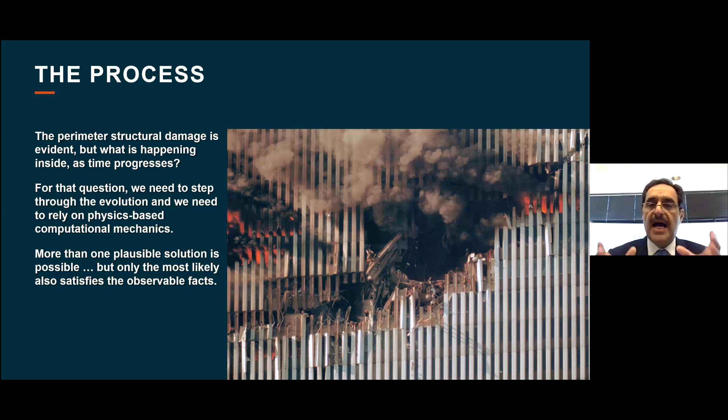Now, more than one hypothesis is possible and was investigated. But once you constrain it by what physics allows and the exterior observable events, like the photo you see on your screen, we arrive at a single most likely plausible course of events. That's what I'll present to you.

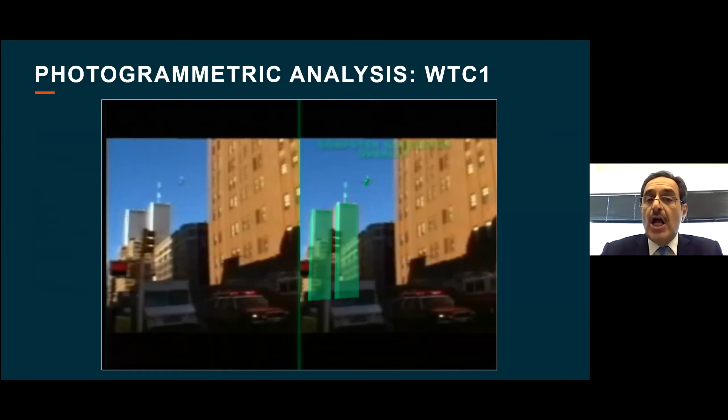So how do we go about doing such an investigation? First, for the collapse of the North Tower, there was a single video that captured the impact, which you just saw a snippet of. Now, if you think about trying to triangulate where the airplane came from and at what speed, a single video is clearly not enough—you typically need two. But we made use of the fact that the video had audio recording, and we could hear the frequency shift as the airplane went behind the building you see to your right.

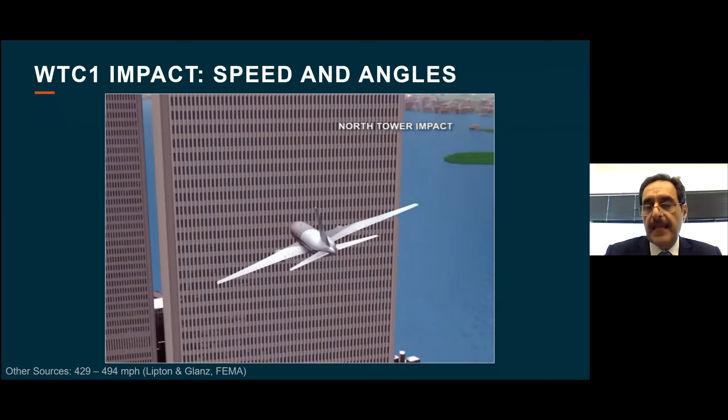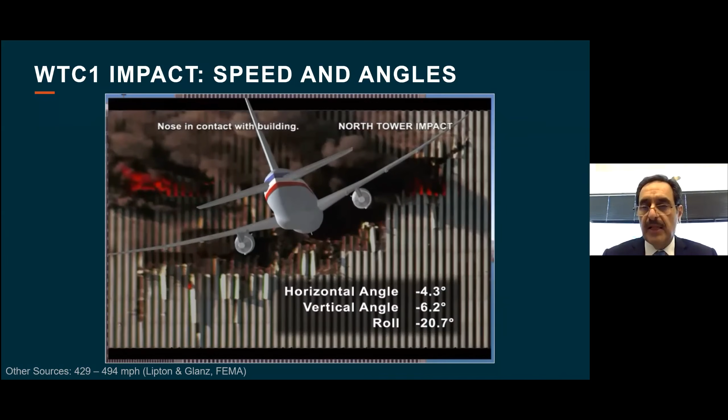That happens to be an AT&T building. Using those two pieces of information, we're able to arrive at pretty good estimates of the impact speed: 500 miles an hour, which is cruising altitude speed. The North Tower impact is pretty much head-on. It engaged four floors, between 94 and 98, but otherwise went centrally through the center of the building without much of a rolling angle.

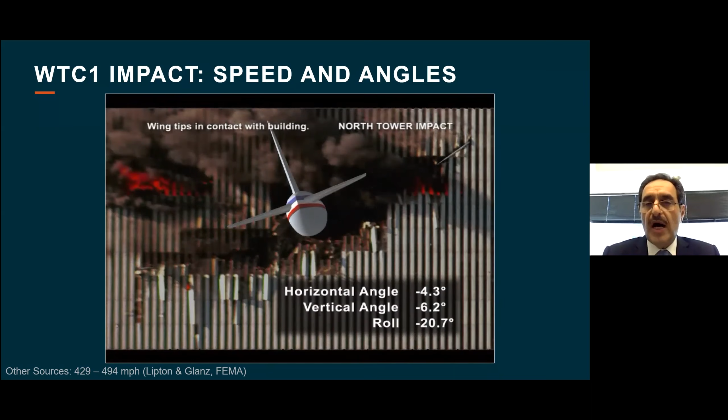So this is the first piece of information for us to start understanding what happens once that airplane goes into the tower. As I said, we're able to ascertain what happened to the exterior of the tower down to graphic detail. This image—and I won't zoom into it further because it still shows survivors who were on those floors at that time—has a level of detail that allows for a very accurate assessment down to what's happening at every connection of every beam, every column.

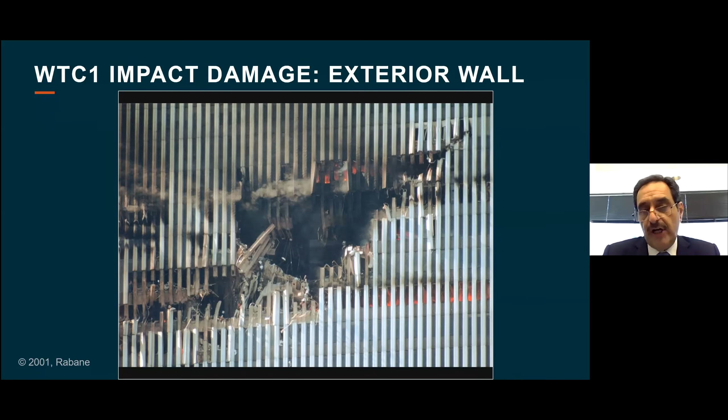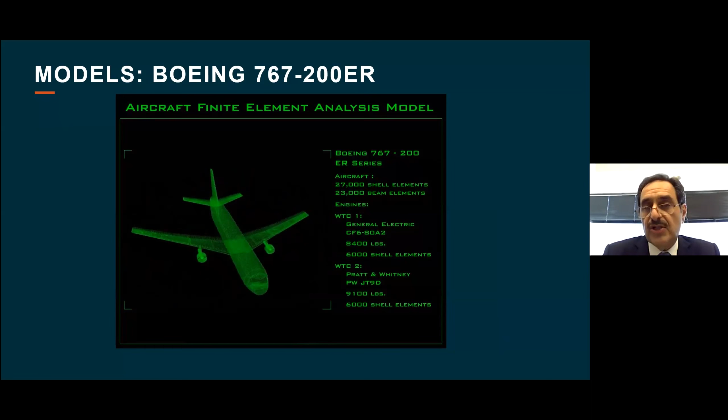But in order for us to understand what's happening inside, we need to build these extremely detailed models of airplanes. Of course, the only place those come from is the Department of Defense, because such airplanes have a defense version of it. We had consulted for the Department of Defense on airplane crashes before, so we had access to such detailed models.

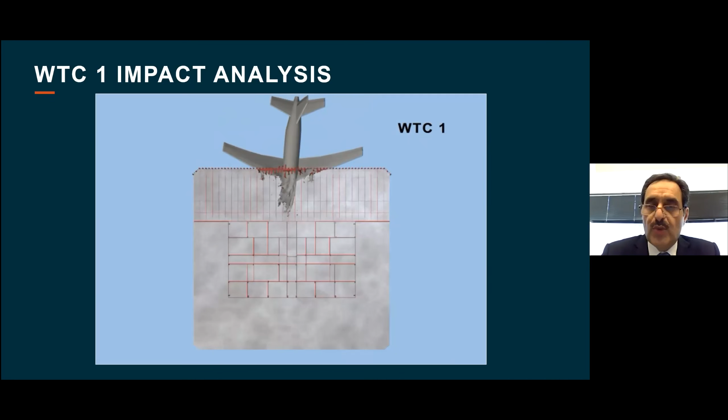As you can see on the screen, we're talking about a pretty sophisticated model. Once we take the model of the airplane and impact it at the speed we determined before, we see what happens to the inside of the tower. We're looking top down at a given floor, and it's interesting to understand what that is telling us. It tells us that the airplane does not penetrate whole.

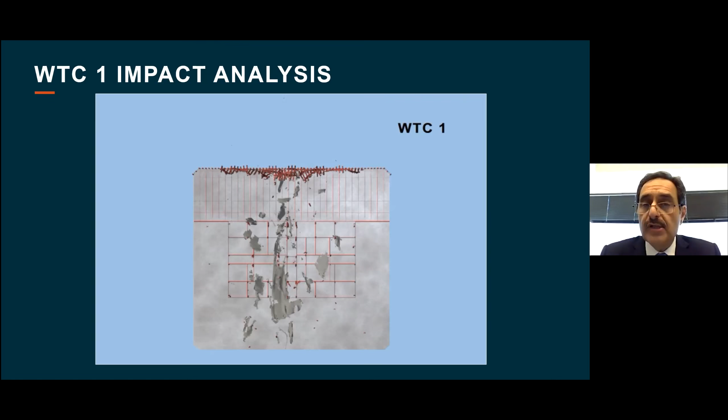It has a thin aluminum skin, so the minute it breaches the perimeter wall of the building, it's converted into an incredible flow of debris, very damaging debris. These are pieces of metal flying at 500 miles an hour, but it's more akin to a power wash than to imagine a plane going in whole into the building. Of course, some of the columns in the center of the building, in the core, you see them getting severed.

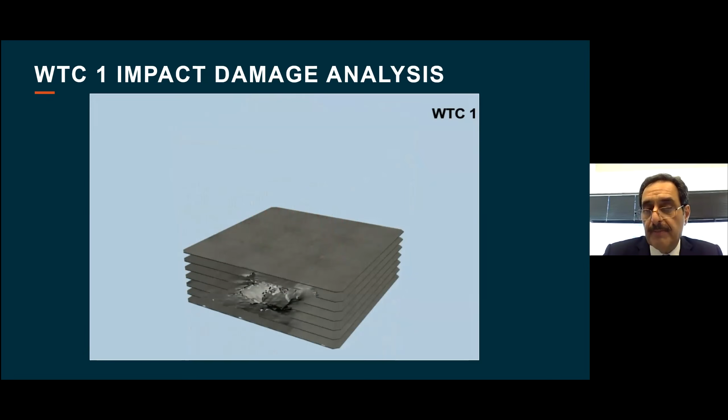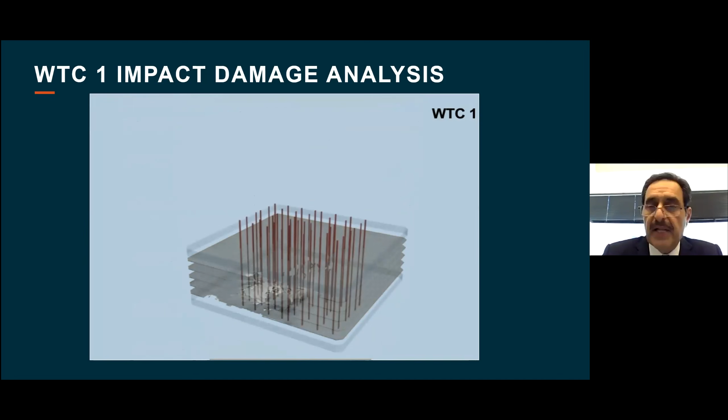So if I am to summarize quickly what happens to the building: the exterior perimeter, about half of that face is severed over about 4 floors. The concrete slabs are only damaged in the immediate vicinity of the impact. It's not a failure beyond that, which some people had postulated. You will see in the center core of the building, in the red zone, columns are severed.

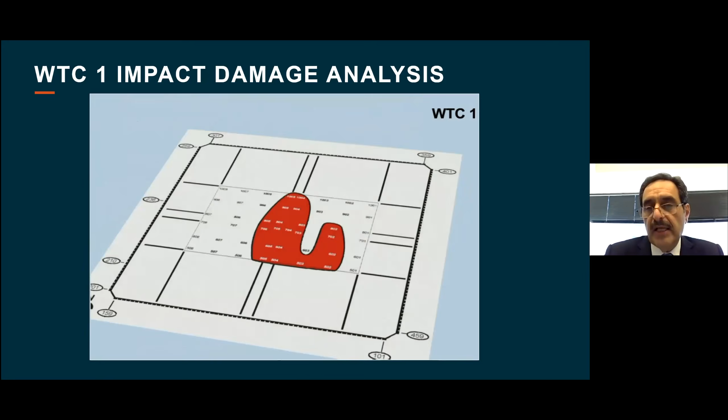Notionally, you can intuitively understand that the columns were severed in the first few milliseconds and the tower stood. So the towers could sustain the loss of the columns in the red region. But after that, for the rest of the duration, fire is attacking the rest.

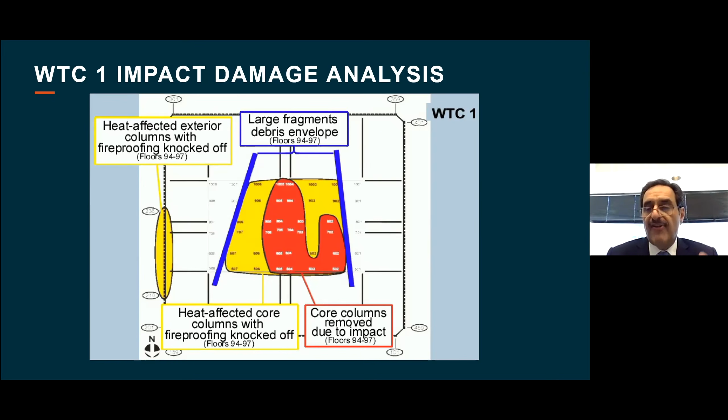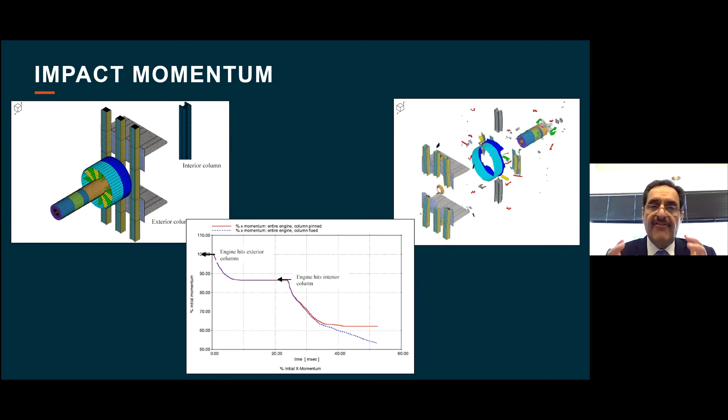Just to give you a sense of the violence of that impact, this is a model of just the engine of the airplane penetrating the exterior perimeter wall of the towers. If you calculate how much energy is left in that engine after it's penetrated the exterior wall, it's only exhausted 15% of its momentum. So it still has 85% of its damaging potential. That is just to display the violence of that attack.

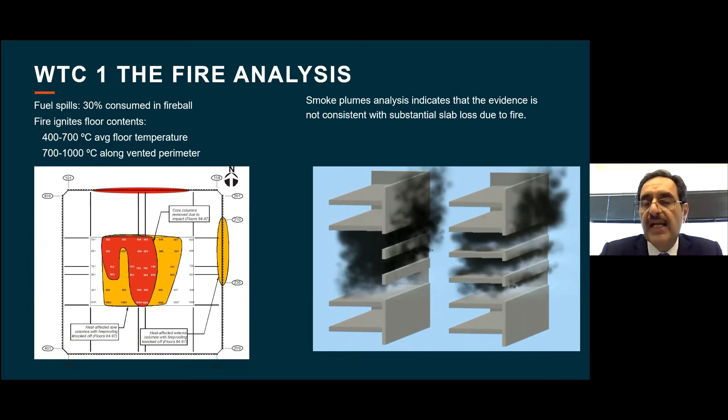People talked in the immediate aftermath of 9/11 that the construction of the Twin Towers was so light that there was a wholesale failure of the slabs. That did not occur. We have the investigations you see on the right screen. By looking at the pattern of smoke being exhausted from the fires, we can tell, in addition to having photography, that the slabs are in place.

So for all of the innovation introduced in the towers in the 70s, they are a marvel of engineering. All the innovation, all of the firsts that people questioned after 9/11 as being potentially the fatal flaw—ultimately the investigation revealed they were not a fatal flaw.

Now, the fire that started by having the fuel disperse across entire floors and light up simultaneously—the temperatures reached are no different than a regular office fire. What is different about them is the simultaneous nature of them across multiple floors, up to 4 floors.

People talk about an explosion that arose from the south side of the North Tower. That is more like an aerosol can mist that you ignite—it's a deflagration, not an explosion. That consumed about 1/3 of the fuel.

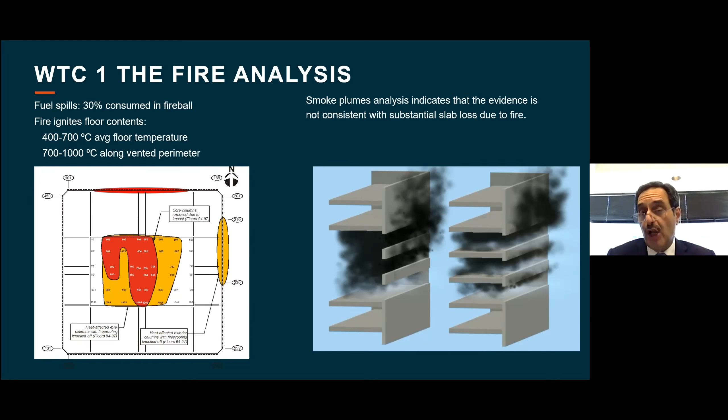1/3 dispersed on the impact floor and started the fires. The last third went down the core of the building, and that is why you hear stories of fires erupting in the lobby at the base of the towers.

Also, what is special about those towers is that they had that outrigger hat truss at the very top of the building. What was its function? Its function was to stiffen the towers a little, because under heavy winds they would sway, and they would sway up to 10 feet. So this hat truss was meant to stiffen the top so that they sway less.

I know you think it's dramatic for a tower to sway by 10 feet, but the human body responds more to acceleration rather than to the extent of sway.

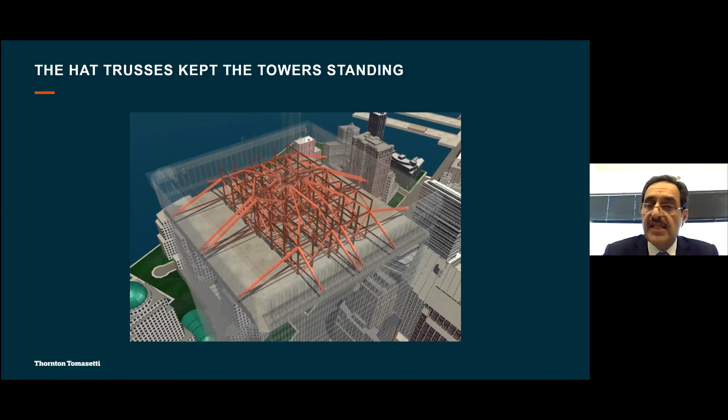And it doesn't mean it's unsafe, it's perfectly safe. But those trusses also carried the two major Manhattan TV broadcast antennas. On 9/11, they had a life-saving role. As you can see, that hat truss connects all of the interior columns to the exterior perimeter columns. So what happened?

Before impact, if we think of green as good, red is bad, yellow is in between - those towers are designed to sustain hurricane winds, we're talking over 100 miles an hour. Well, on 9/11, the winds were below 10 miles an hour. So you have excess structural capacity that is being untapped.

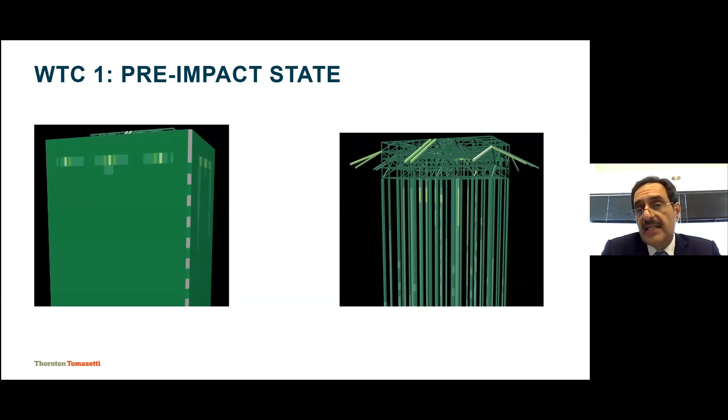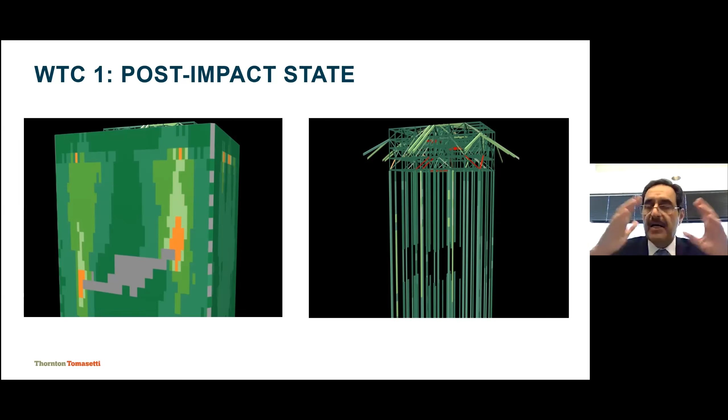The airplanes hit. Immediately after, if you look on the left picture, you see the stresses are redistributed around the injury on the outside wall. As massive as it is, you get some stress concentrations at the edges, but the towers redistribute the loads very well. In the core, on the right pictures, you see some columns missing.

Well, now you have up to 20 floors dangling along those columns that were severed. Their weight, instead of being sent down to the foundations, is hanging off of the truss. The truss then distributes that load to columns that are still unsevered, and their weight goes down to foundation. That is why the tower stabilized immediately after the impact, and that is what essentially enabled the safe evacuation of the entire population that was below the impact zones in both towers.

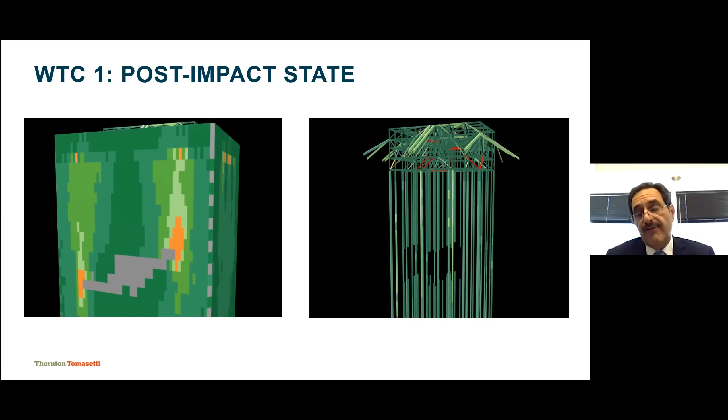Our death toll was primarily people that were above the impact zone and couldn't evacuate, and the first responders that rushed in to try to help the survivors and help with the evacuation.

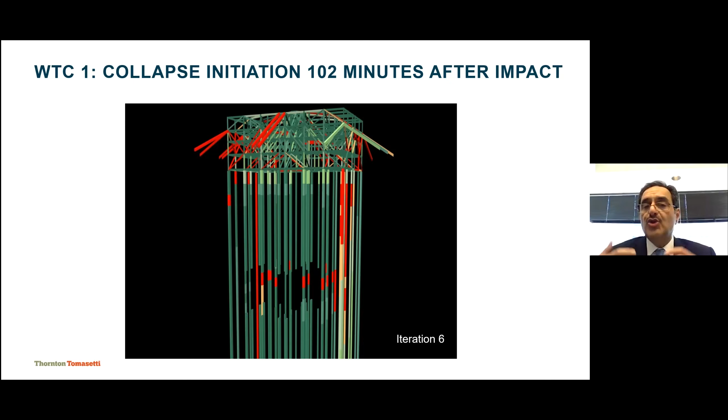Of course, 102 minutes later, the fires continuously weakened the steel. Steel at those temperatures doesn't melt, it just weakens. So think about it - at 1,000 degrees Fahrenheit, the steel is half as strong as it is at ambient temperature. When the temperatures reach up to 2,000 degrees Fahrenheit, the steel has lost 80% of its strength. So clearly the core is being weakened, and the hat truss is working harder and harder to try to shed the load onto surviving columns, but ultimately there's simply not enough capacity in the tower, and the collapse initiates.

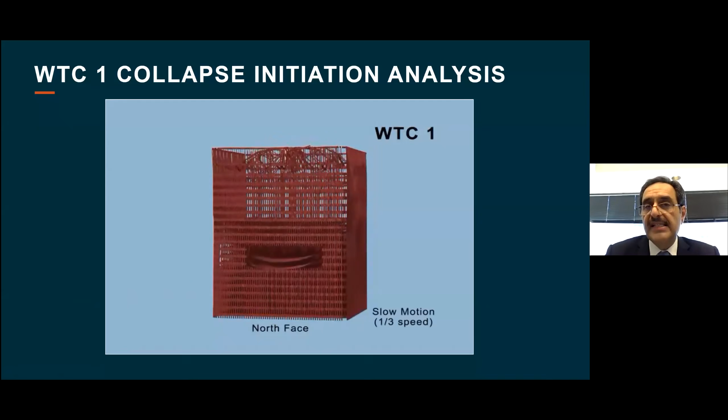That is the collapse of the North Tower. You can see it core driven in the center first, and then the outside perimeter wall follows.

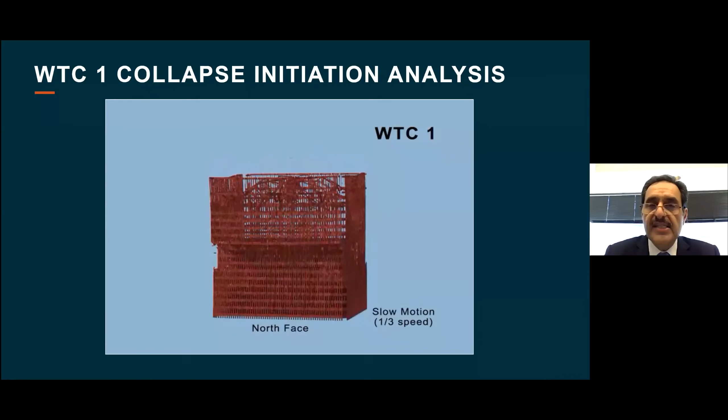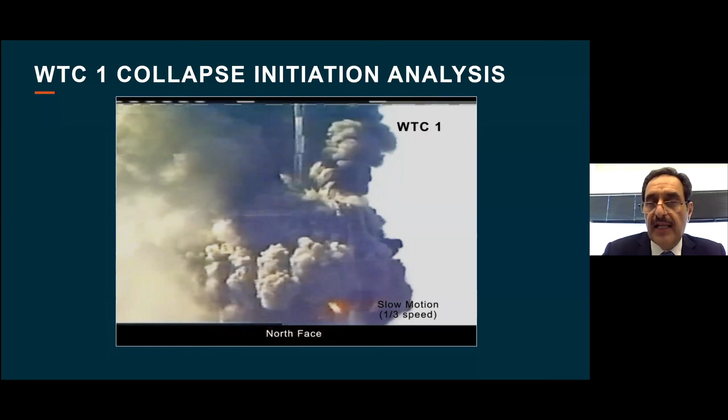So how do I know that this physics calculation is meaningful? We overlay it on actual video footage on the day, and keep your eye on the TV antenna at the top, and you'll see it starts coming down exactly the way the analysis predicted the collapse happened. The overlay of the calculation and the observable events is amazingly good.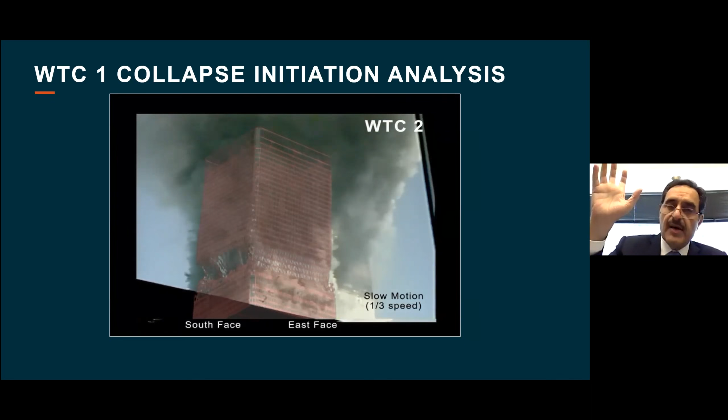The South Tower - I won't go through the whole investigation - but the South Tower impact was eccentric. And that's why the South Tower first tipped at the top, but then gravity is the single strongest force that governs a collapse. Once that tip occurs, the rest is simply coming down.

It's a pancaking event, floor over floor over floor, until you just have a massive rubble at the bottom. So when people talk about this looking like an implosion - yes, a building collapses, a building of that height always collapses that way. It never tips over sideways. That's cartoons, that's not physics. That's the mere force of gravity.

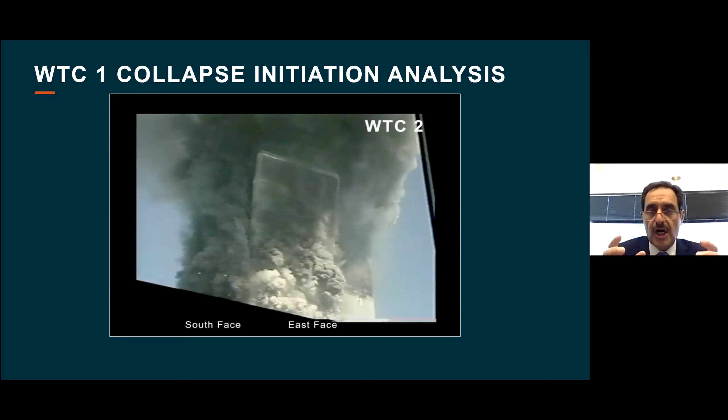People who induce implosions, all they look to do is weaken columns such that gravity does most of the work. In this case, the airplane attack did something similar, and the subsequent fires weakened columns, and ultimately gravity takes over.

So I know I rushed through an investigation that lasted 10 years across the 3 towers, but it allowed us to speak with knowledge to some of the public questions beyond just the litigation. The Twin Towers were well designed, extremely well maintained, beyond what is customary in high-rise buildings. We understand exactly why and how the collapse happened. It is not just the airplane impact, it is the fire attacking and diminishing the residual remaining strength in those towers.

And they had lost their ability to resist the fire because they got stripped of their fireproofing by that power wash from the debris of the airplane. We understand where the collapse initiated, how it initiated, and why it fell, and the differences in the collapse mechanism between the South Tower and the North Tower. So in some sense, for us to be able to understand how we look at other buildings or future buildings, it was critically important for us to understand what happened here.

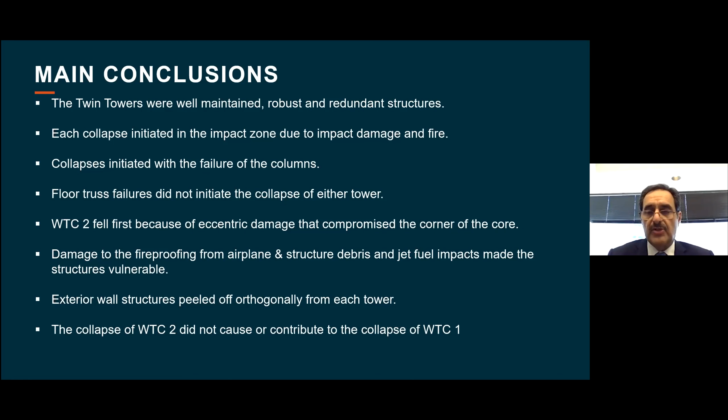So now that we are 20 years later, some of the normal questions one would ask: did we change how we design and build towers, especially skyscrapers? The answer is yes. We learned a lot from 9/11, the way engineers have historically always learned from failures. Even when things were done well, there's always a lesson to be extracted. Tangibly, the lessons adopted in future buildings is that man-made attacks are part of the profile of what we consider in the design of high-rise buildings. Evacuation and means of egress are part of explicitly what we are designing, thinking of events of this nature.

Does it mean that we design for plane attacks? The simple answer is no. Could we? Potentially we could, but no one wants to live in a bunker in the sky or work in a bunker in the sky, right? It is the same reason, and that's part of our daily experience. When each one of us gets into a car and drives, we know that we are not perfectly safe. We are taking a measured risk just because we grow up seeing car accidents, seeing mangled cars, probably knowing somebody who was injured or died in a car accident. Yet most of us don't bring that thinking to buildings because no one talked to us about it, unfortunately. And there is a communication gap between how engineers work and what the public at large is aware of. So no, we do not design for plane attacks because it's not part of what is desirable, or at least that is the current risk profile of what we believe the urban environment chooses to be.

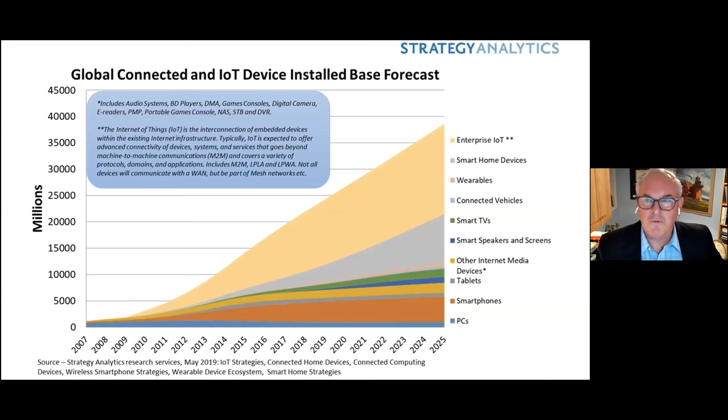We're layering on top of this more connectivity with the Internet of Things. From a base around 2007, when we virtually never connected physical objects to the net, estimates are that 4 years from now we'll be at about 38 billion connected devices. Everything from our refrigerator to our smartphones, talking to our cars - everything's connected. But those connections again create dependencies and interdependencies, and create the risk of cascading failure if we don't think about how we deal with issues of safety, security, and ultimately resilience. So this captures the story of the Internet of Things.

At its core, another way to capture this is that part of our challenge with interdependency is systems that were often built for a specific purpose - to provide power, to provide transportation, to provide fuel or communications. Over time, we've engineered these so that they are constantly interacting with one another, so there's a level of tremendous mutual dependence and interdependence.

If we lose power, there's one impact that's most obvious for us: it cascades and impacts transportation and emergency services. If there's no power, you can't run a compressor station that moves natural gas down its line to ultimately provide that fuel. Our communications ability starts to fail. Our water systems rely on energy, and if we have no water, we probably don't have any way to cool a power plant, which may lead to it coming down.

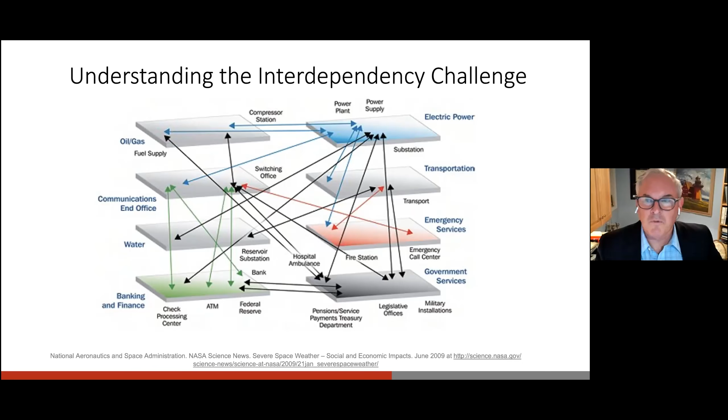As we saw with the story just this past winter, with the failure of the Texas power grid, its biggest impact was loss of water, and the impact that even had on providing medical help and health services at a time when we were trying to treat people with COVID.

In Puerto Rico, we saw this really play out in Hurricane Maria, this risk of cascading effects. Hurricanes hitting Puerto Rico is not new; they've been hitting Puerto Rico for its entire existence. What made Maria truly catastrophic is that all the lifeline systems, all its critical infrastructure, failed simultaneously.

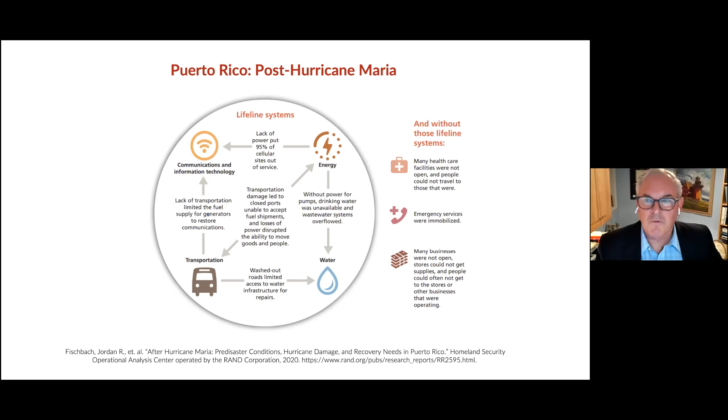When the power went out, the communications went out, and we lost the means to move water, and there was no longer water to be pumped to provide people basic services. Transportation systems were knocked out, so you couldn't move the diesel fuel needed for backup generators. And so systems continued to fail, including the port and the surface transportation that could move things out of that port. So why Puerto Rico ended up basically completely on its knees was because the total systems failed as a result of the way the hurricane impacted on it.

On 9/11, there was another part of the story that people don't know, and this is such an important one. It took us many years to understand that in fact the towers were built quite robustly and capable of withstanding the impact they had, up to a point. We tended to feel in that day that we were in fact incredibly vulnerable, incredibly fragile.

10 years after 9/11, I was able to finally get this story told. If you just go on Google and search 'boat lift,' you'll see this story. When the towers came down and people fled, they went in all directions, and many went south, discovering, some of them for the first time, that Manhattan is indeed an island, and they couldn't get off. So they were trapped down at Lower Manhattan, and a Coast Guard lieutenant on a New York pilot boat, who was there to try to support a medical evacuation of survivors, which unfortunately there were not, realized that we needed to coordinate a way to get people off the island.

He issued a call over Channel 16: all available boats, if you can help evacuate people from Lower Manhattan, come to Governor's Island, just off the tip of Manhattan. What was extraordinary was that over the next 9 hours, 500,000 New Yorkers were evacuated by boat, which is bigger than the evacuation at Dunkirk, where 338,000 British and French soldiers were evacuated over the course of 9 days. And this happened literally in real time.

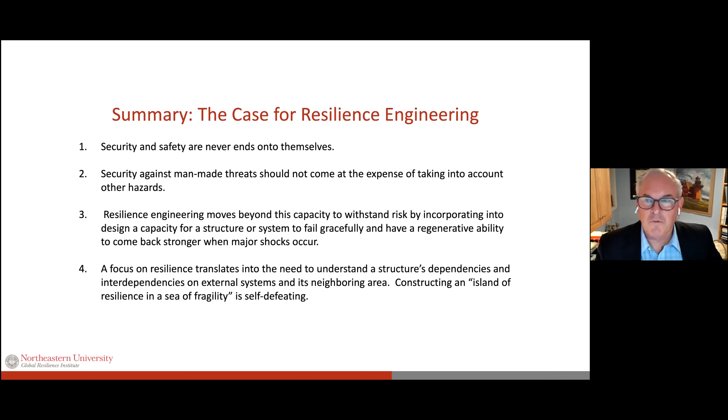At the end of the day, we can deal with risk, but we have to think about it in the context of safeguarding critical function. We've put enough on the plate here that questions will come, and we'll go from there.

Thank you, Steve. Carol, do you have any questions? I don't necessarily see them. I will have my own questions. I will mention...

One question came in from the audience, and I encourage others to pose them in the chat. The one I saw, about floor trusses, has since disappeared. But let me preface that question with a return to the analysis of the collapse of the towers. Najib, I think you left us all breathless with those animations and your narration and explanation. There are topics that people continually insist are features of the collapse.

One of these is the floor trusses. Some people may have seen the History Channel anniversary two-hour documentary on the collapse of the towers, and Najib was featured in that. But the New York Times, in real-time analysis by Eric Lipton and especially James Glanz, identified the floor trusses as a point of vulnerability. Perhaps you could speak to that, and then we can discuss additional issues. The question from the audience was, what about the floor truss expansion? Was there heat from the fire that pushed against weakened columns?